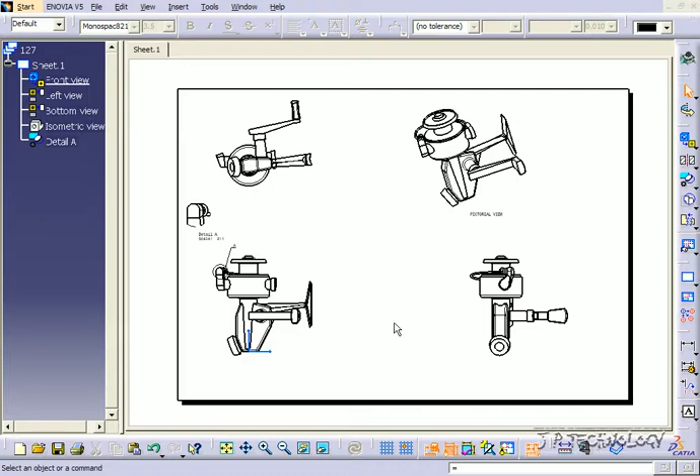To start off, open up tutorial part number 127, which is located on the DVD. Now we're going to go over anchor points, and what these do is, when we're trying to dimension circular objects or curves, we're able to select certain anchor points, and those are the points we'll position and create our dimensions from.

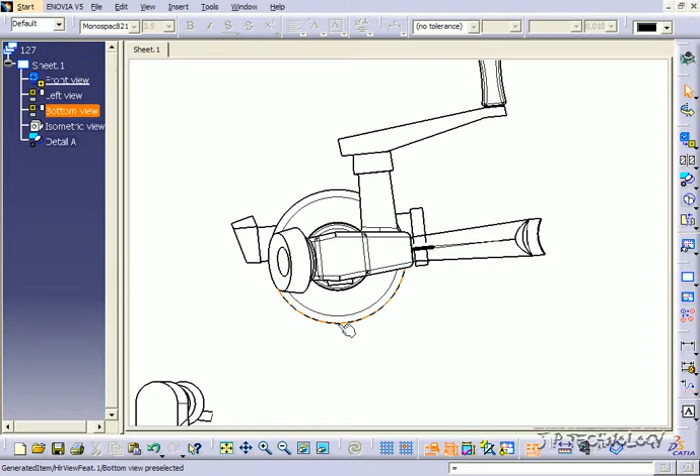So say I want to dimension from this line here to this edge here. I want to know the dimension vertically, how far it is away from each other. Normally I'd click length, click vertical, click this line here, but what I'm getting is the center point of that curve. That's not what I want.

So I'm going to have to play around with the anchor points. To get to the anchor points, it's while you're positioning it. So let's click length, click this line here, right click, and select extension lines anchor.

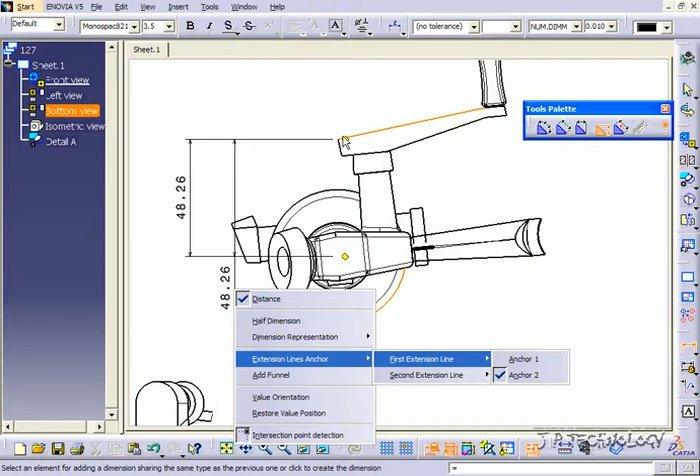There's the first one and the second one. The first is going to be your first selected point, so there's anchor 1 and anchor 2. Right now it's on anchor 2. If I put it to anchor 1, it's going to be up there. So let's position it on anchor 2 - I'm happy with that.

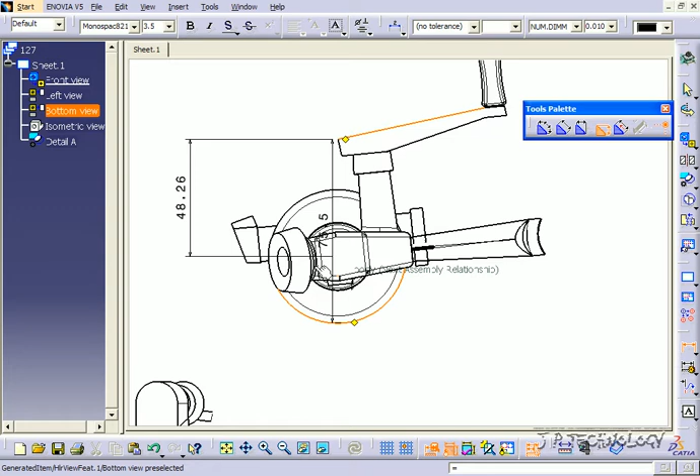Now let's change the anchor for the circle. For the second extension line, let's put it to 1 - that's not what I want. Put it to 3, and that's what I want. So you're just going to have to play around with the anchor points until you get it, and once you do, click OK and you've positioned it.

So you can do this with lines, circles, whatever it may be. If you're having trouble getting the actual dimension you want between two objects, you might need to play around with the anchor points. Now you're also able to use the intersection point detection, which is going to help you get some anchor points.

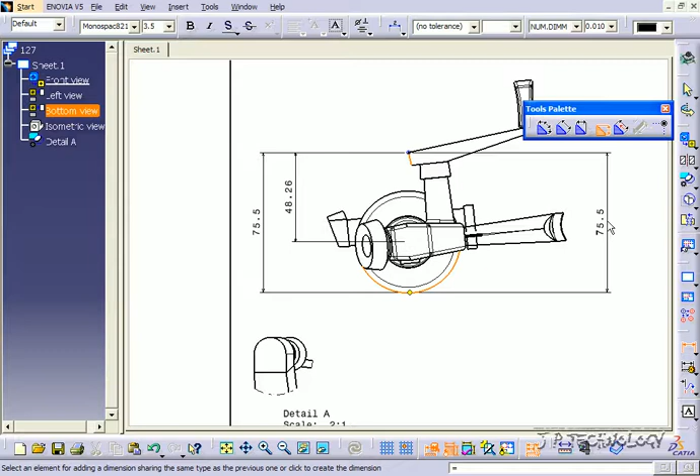Like I can get this point here, but I can't find the anchor point here using intersection point detection. So you can anchor it down with this, then click down here and play around with the extension line. I'll put it to 3, then put it to 1. Every time it's going to be different, depending on what you're using and what you're dimensioning.

So using the anchor points is going to keep your drawings more precise, more accurate, easier to read, and it's going to get you the results that you want. And that concludes our tutorial on anchor points within Catia v5.